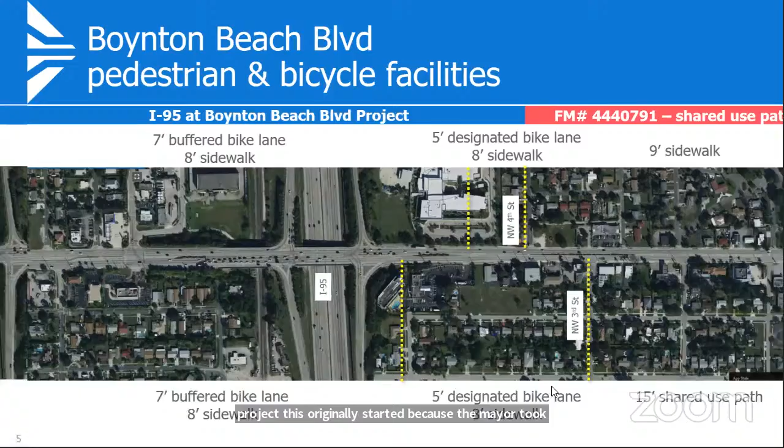Good morning everybody, Connor Campobasso. We've been working with both DOT and the city on this project. This originally started because the mayor took a look at the DOT project at the interchange, and he wanted to provide a little bit more space for cyclists, both on the sidewalk and on the roadway. So through the interchange of Boynton Beach Boulevard and 95, there's a 7-foot buffered bike lane, as well as a wider 8-foot sidewalk to allow for both pedestrians and cyclists.

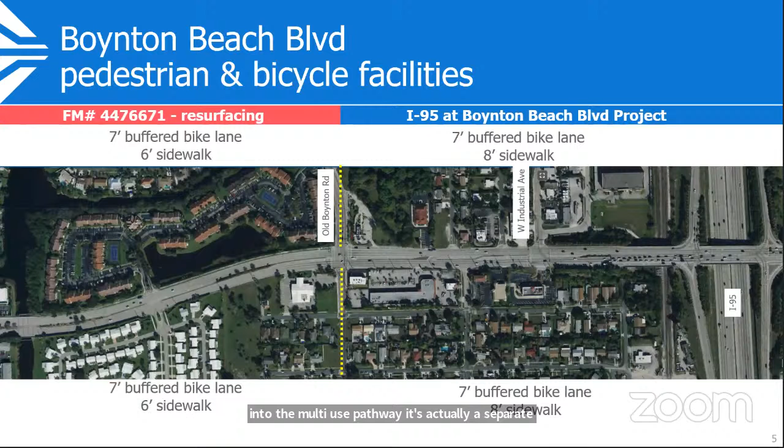There's also other projects in this area. When it merges into the multi-use pathway, it's actually a separate project being done by the city. The reason why it's a multi-use pathway in that area is, one, there's not a lot of right of way in that section, and two, it's transitioning into the more downtown areas. So they wanted something a little bit slower and more conducive to that. So what they decided on for that section was that multi-use pathway, and that's why it transitions into that during that area.

The multi-use pathway in that area on the north side, I believe it's 9 feet, yeah 9 feet, and then 15 feet on the south side. So we think that's enough space for both pedestrians and cyclists to intermingle in a safe way, and so does the city as well as DOT. So that's kind of where the alignments came from, if that answers your question.

Yeah, Mayor Grant and I don't agree on this, we've had several different discussions about it. I just think it's dangerous. You get a deaf mom pushing a carriage with her infant, and she's got a little 3-year-old running around in front of her, and she's not going to hear a polite bicyclist say 'on your left,' so she's not going to know to collect her child. And a bicyclist doing 20 miles an hour hitting a kid who weighs 40 pounds, that's some serious damage. And the kid doesn't have a helmet, at least the bicyclist should, but it's just dangerous.

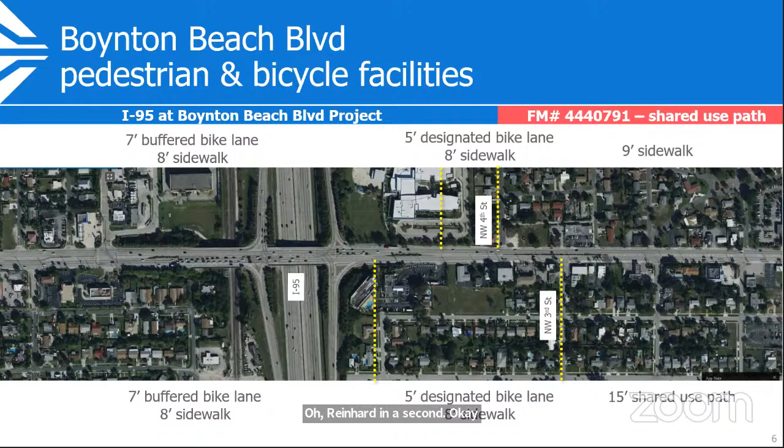So the next item is a resolution affirming TPA support for the Atlantic Avenue widening project from Florida's Turnpike to Jog Road. Connor Campobasso will be presenting this.

Good morning, everybody. I'm just going to give a short intro to the resolution portion, and then DOT is going to give a full presentation on the different typical sections and everything going on in the corridor. I wanted to highlight the resolution and give you some background on where it came from.

This project has been programmed into our TPA for a while now, and DOT's been working on the PD&E process. They've even held a public meeting, and during that same timeframe they also did a presentation to our board. The board had some concerns about different portions of the project, specifically the typical section as well as the interchange at Jog Road.

With the typical section, their major concern was that a roadway with 6 lanes and speeds of 45 miles an hour wasn't really safe for road cyclists to be biking on, especially if there was no protection for them on the roadway.

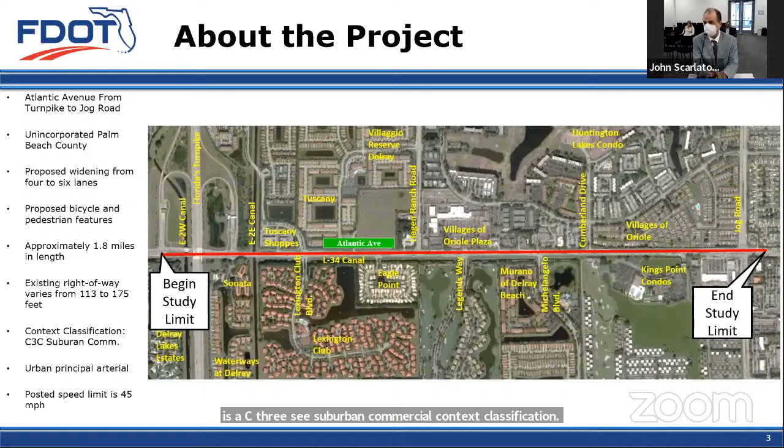This typical section, which we are showing, is from Turnpike to Cumberland Drive. It comprises a 22-foot median, 6 travel lanes, 3 in each direction, which are 11-foot lanes with 7-foot buffered bicycle lanes on both sides of the road. There's a guardrail on the south side to protect from the canal hazard for drop-offs, and a 10-foot sidewalk on the south side and an 8-foot sidewalk on the north side.

This was what was originally presented for this segment. For the canal, we would be looking at having to reduce some of that canal right-of-way anywhere between 55 and 90 feet. Lake Worth Drainage District, which owns and maintains the canal, has requested to maintain a minimum of 75 feet. With that, there are some areas where we would be looking to possibly pipe the canal, so we're working with the Lake Worth Drainage District on that.

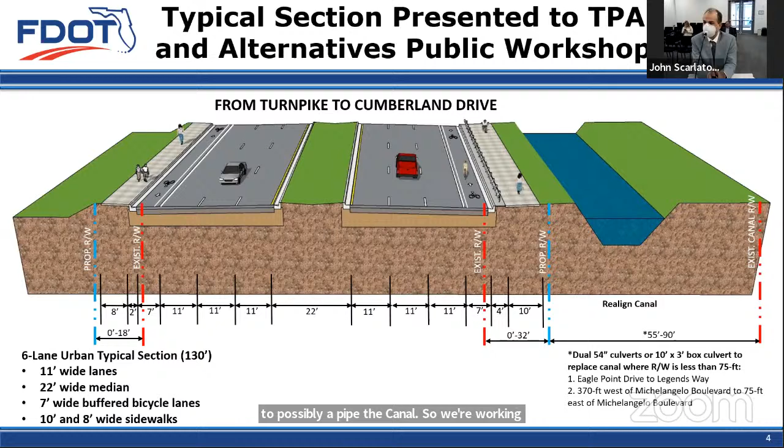The next section is from Cumberland to Jog Road. The roadway features are the same as the previous typical section, still with a 22-foot median, 6 travel lanes comprised of 11 feet width each.

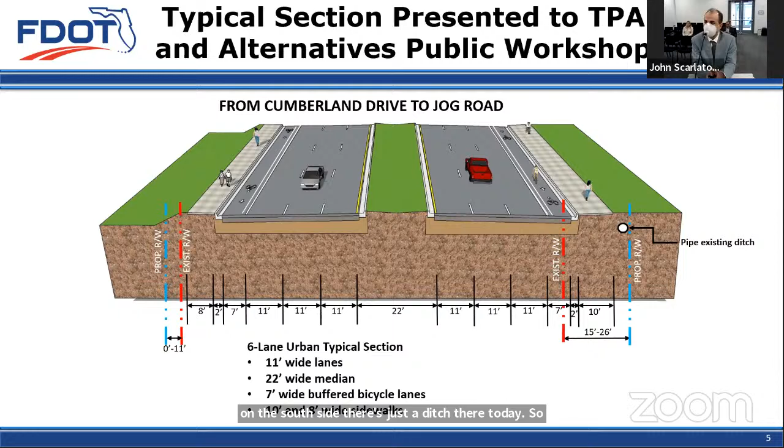Still have the 7-foot buffered bicycle lanes, 8-foot sidewalk on the north side, and the 10-foot sidewalk on the south. The only difference here is there's no existing canal on the south side, just a ditch. So we've coordinated with the Lake Worth Drainage District, and they've given us the okay to consider piping this area since we would be filling that ditch.

Some of the feedback we received from the TPA board presentation was to look at wider pathways, potential shared use paths on both sides, and physically separated bicycle lanes along the corridor.

We had our public workshop held at the end of June, virtual on the 28th and in person on the 29th. There's a pretty long list of comments received—concerns about noise, impacts to driveways on the south side where there are residential communities, and so forth. One key takeaway was the request for physically separated bicycle lanes, requested by one of the commissioners.

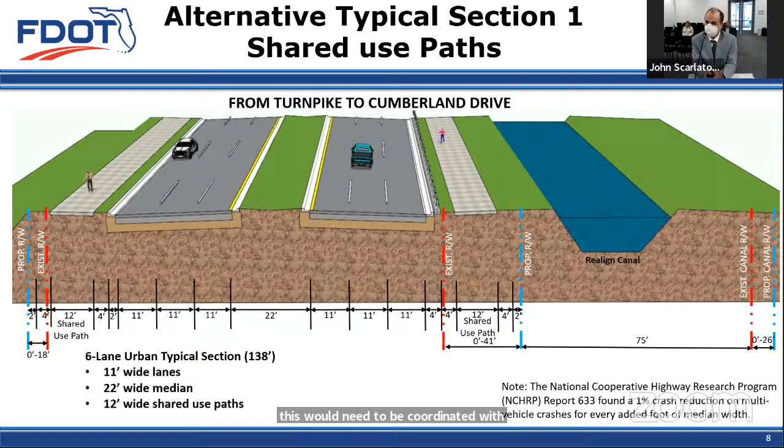You'll notice we're looking at some potential right-of-way acquisition on the south side of the canal from private property with this alternative. This would need to be coordinated with Lake Worth Drainage District to see how much of the canal can be piped to avoid those impacts on the south side.

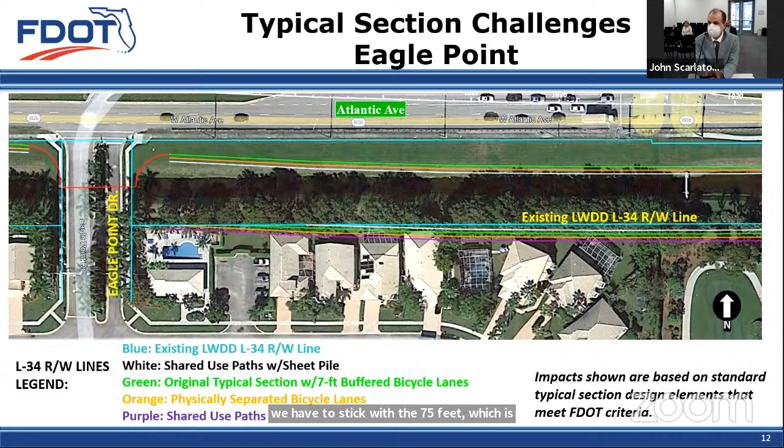So some of the other challenges is the transition of the typical section going to the west here. We were originally with our first concept looking to... so we were looking at transition at the intersection just east of, on the east side of, the Turnpike Bridge. Because to the west of that intersection, there's already striped out area for the 6 laning.

So with that, we weren't looking to widen any of those bridges. The 2 bridges that you see on the east side of the Turnpike Bridge, we would just be doing a restriping configuration. So with these new alternatives, we would have to widen those bridges if we were to carry this through the intersection all the way to the other side of the Turnpike. So that's going to be a lot more added cost to widen those bridges.

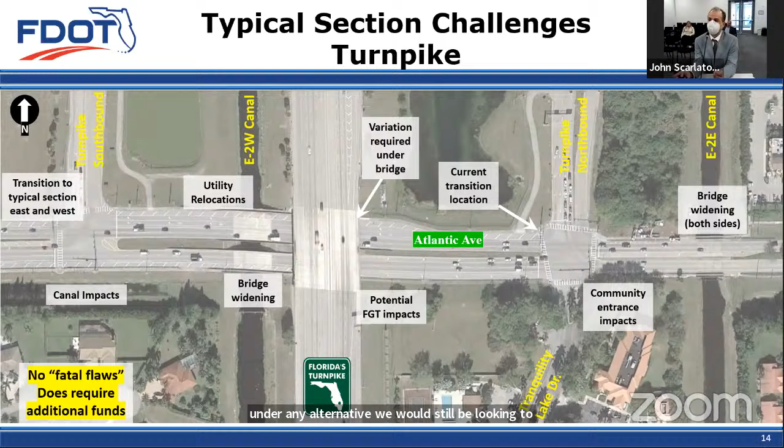There's going to be more utility impacts if that moves forward, as well as the recently widened bridge, which is at the E2E canal to the right of the screen. That north side of the bridge was recently widened and opened to construction earlier this year, so we would have to further widen that, as well as widen the south side. Under any alternative, we would still be looking to widen the south side of the bridge, but previously we weren't looking to further increase the width of the north side since that was just recently widened.

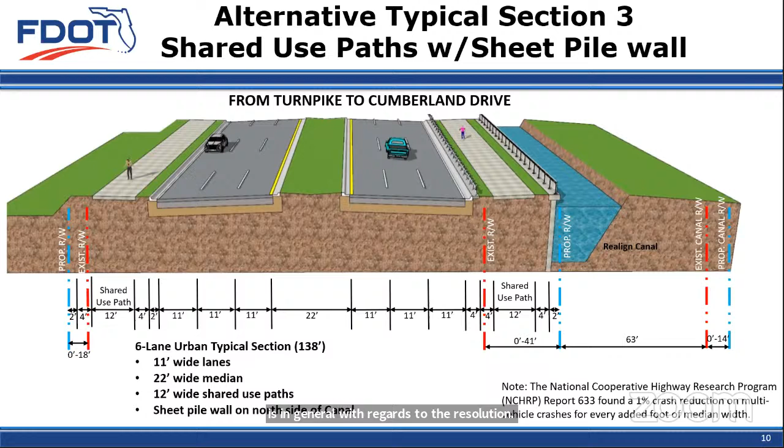Just a few comments. One is in general with regards to the resolution. I have a little bit of concern with the way it's worded, in the sense that it's supporting the project as a whole. And I take that to mean that if we were to approve the resolution, we support all of the alternatives presented here. I think you're hearing a lot of discussion about concerns with some alternatives, and preferences for others. Since there doesn't appear to be any prioritization of which one is preferred, approving the resolution makes it sound like we're okay with all of them.

On that note, with regards to the alternatives, I think this discussion of a shared use path versus separated bike lanes versus buffered bike lanes is coming up quite frequently across all of our projects. I'd be intrigued—maybe it's a separate discussion item for a future meeting—to figure out which one genuinely is better, or if they're the same but better for different groups. I think you see some difference of opinions with regards to it.

I have my own preference—I'm kind of with Ted with regards to concern about shared use paths, especially in urban situations where you have a lot of people walking, potentially tables and chairs on the sidewalk, and then putting cyclists into that creates a lot of concern. With regards to the alternatives presented, I think it's unfortunate that for 2 feet of additional concrete to make it a shared use path, you lose an entire separated bike lane. I think that trade-off isn't necessarily fair.

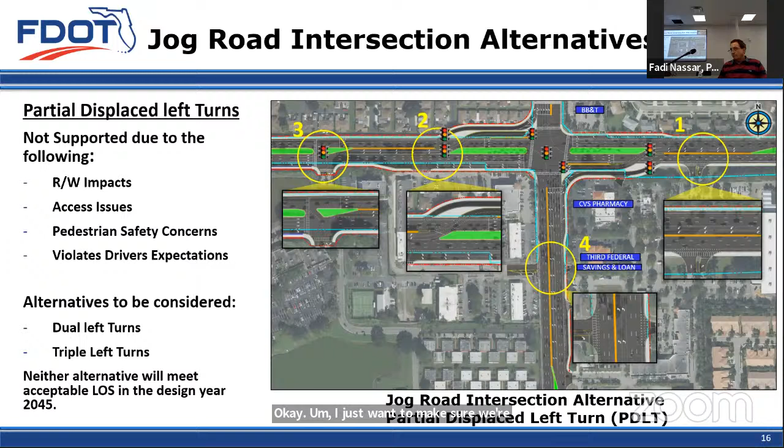I just want to make sure - we had a lot of really good comments and a lot of variety. Was there something you wanted to talk about, Jean? Okay, and a lot of variety in the comments, and I appreciate all that.

I think the goal here, as we sit as the committee, is balance, because we have to balance our charge - safety for pedestrians and bicyclists - with progression of the vehicles, and how we promote multimodal solutions for the most amount of people is really something we have to not only balance, but compromise over. So we have to think about how we're going to get the most amount of people out of their cars, and trust me, I'm one of them.

I like to sit in my car because I have to drop off kids and make errands and do all these things. But one of the things that really made sense to me was not only getting out and riding your bike or walking, but when we did that bike walk audit with Alyssa and her group on Indiantown Road, which is very similar to the road we're talking about today, Atlantic - it's 50 miles per hour. Being context sensitive to what it is, having the driveways, and understanding how to get people out of their cars to help reduce congestion is really about how you make people comfortable.

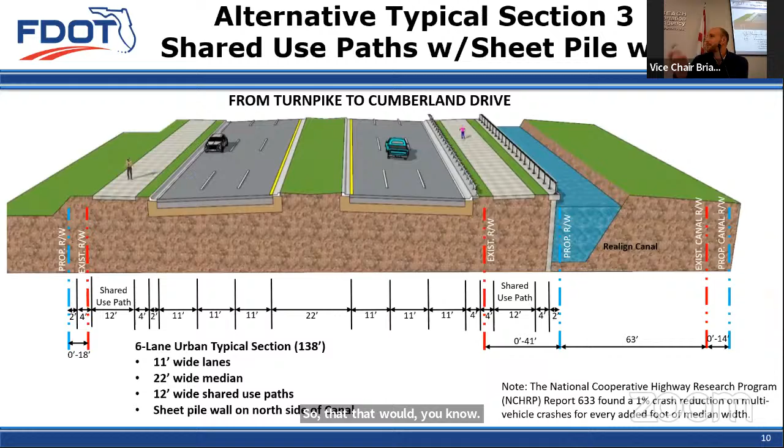Mhm, yeah, is that, this one right here you're talking about? Yep, so that is an option.

So just to be clear, the resolution means that if that gets adopted, we can move forward with anything that we just presented today out of these 3 typical sections. So we would like to get the guidance so that we don't come back several months from now, go to a public hearing, present a typical section, and then someone says, well, we didn't want this, we wanted this one.

So the motion on the table is all of the alternatives and just supporting the project, just to be clear. Correct. It's essentially guiding DOT to at least incorporate a minimum spec of 10 feet of sidewalk, but that includes all these typical sections that they should have, and to get everybody's comments, which we've been doing and all of the other advisory committees have been doing.

I'm not sure if the maker of the motion, or maybe we should just see how it goes. And if it fails, then we would need to, because there's a lack of specificity in the resolution of whether or not a separate motion needs to be made.

Okay, John, do you have additional comments? No, oh, thank you. It's okay.

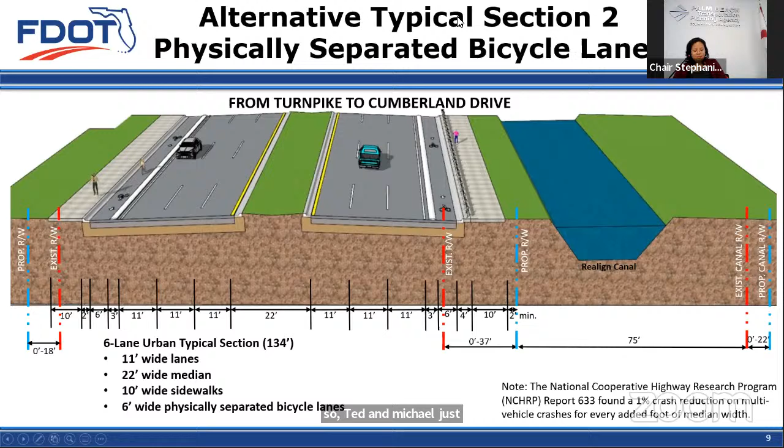Tracy Phelps, Yes. Bruce Rosenzweig, Yes. Craig Pinder, Yes. Ted Goodenough, No. Joanna Paluso, Yes. Joanne Scaria, Yes. Fadi Nassar, Yes. J.C. Berry, Yes. David Willock, Yes. Jean Matthews, Yes. Yash Nagal, Yes. Michael Owens, Yes. Ryan Harding, Yes. John Roach, No. Brian Rusher, Stephanie Thoburn, Yes.

So it passes with 2 opposed. I have John Roach and Ted Goodenough as opposed. Good job, everybody.

All right, next item. I think we're on informational items. Yes, so the Palm Tran Major Transit Development Plan update, and Palm Tran staff and consultants are here to present this item, including my Jill Quigley, who I used to work with a while ago.

Good morning, Anna Bielawska, Senior Transit with Palm Tran. We are excited to present Accelerate 2031, which is Palm Tran's major transit development update. This is our strategic vision for transit services in Palm Beach County for the next 10 years. Jill Quigley from Tindale Oliver will be presenting the item this morning.

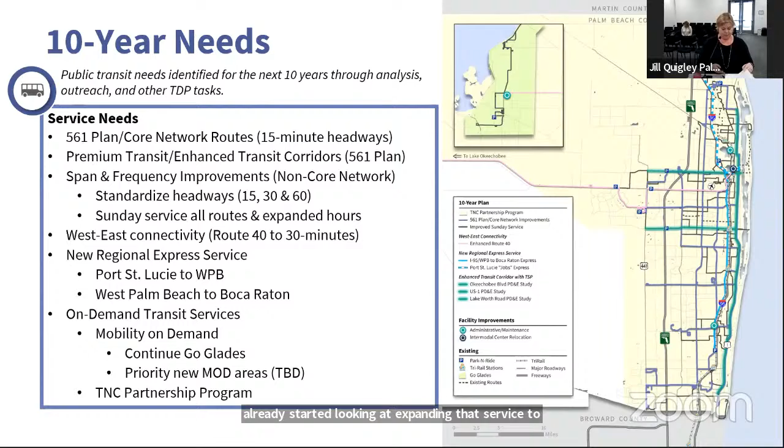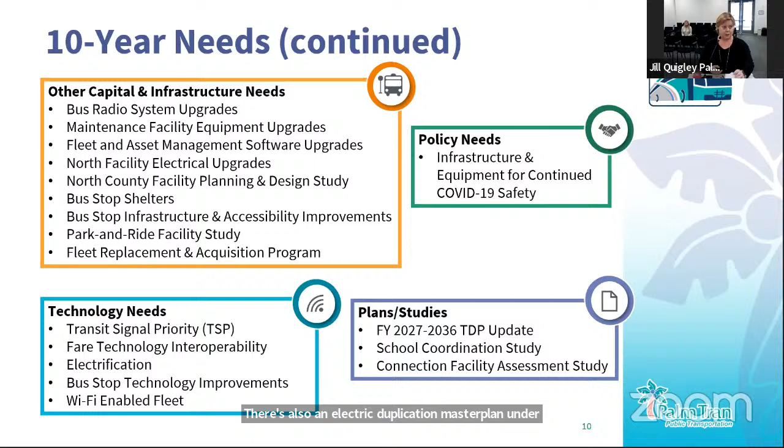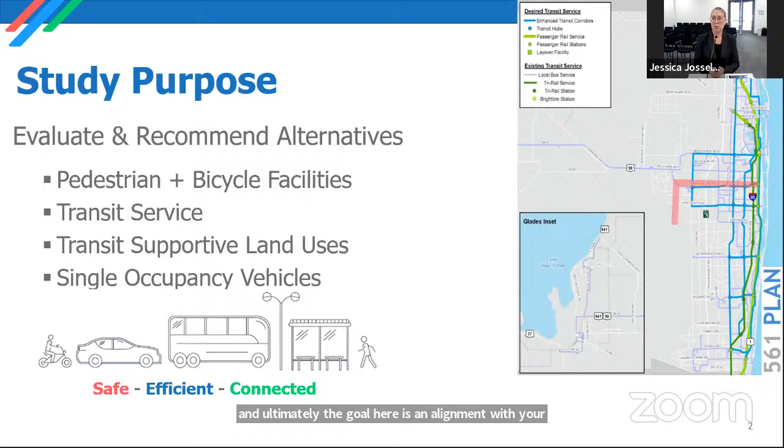Just as a reminder, given it's been a little bit of time, the study purpose of this corridor study is really focused on enhancing transit service from the mall in Wellington to downtown West Palm, and also looking at how to improve the pedestrian and bicycle facilities that would support that transit system. Ultimately, the goal here is in alignment with your 561 plan to create more transportation options throughout the county and create a safe, efficient, and connected system.

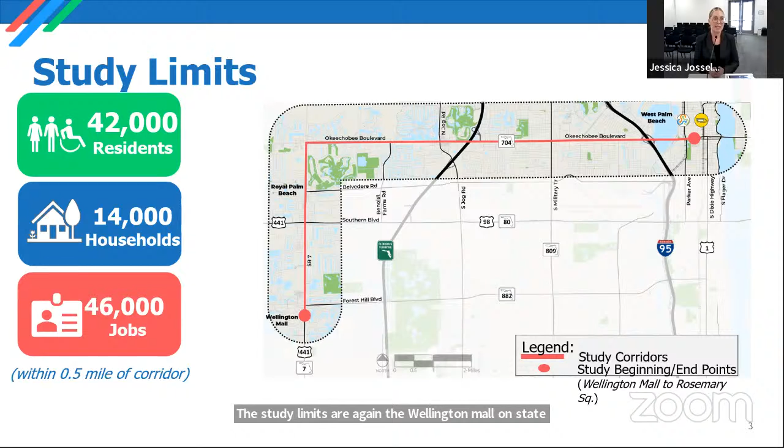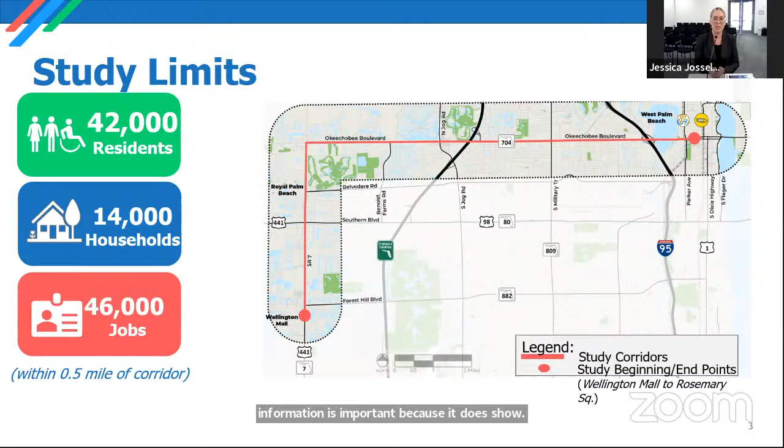The study limits are the Wellington Mall on State Road 7, traveling north to Okeechobee, and then heading east into downtown West Palm. We have a graphic here that shows the number of residents, households, and jobs in the corridor. This is important because it shows a high number of residents and jobs: 42,000 residents and 46,000 jobs. So we see this as a productive corridor to look at enhancing transit to provide more opportunities for folks living and working in the area to have different options than their car.

And I will pass it to Stuart, who's going to walk through some data findings along with me. Thank you very much, Jess.

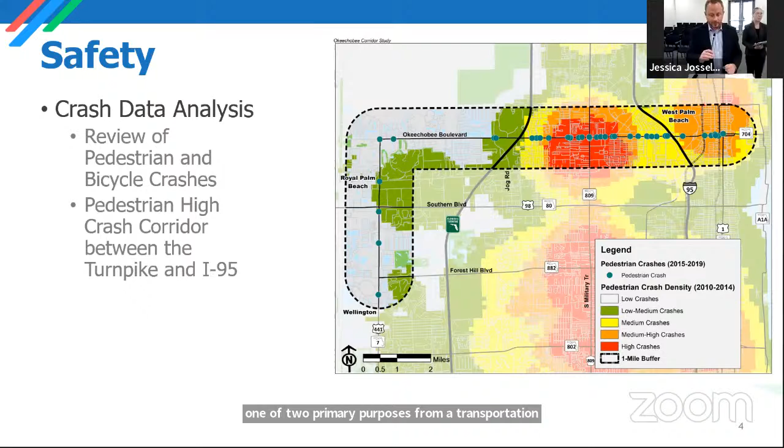From the purpose standpoint, one of two primary purposes from a transportation perspective is multimodal safety, and trying to enhance multimodal safety. Crash data for the Okeechobee Boulevard and State Road 7 corridor show that multimodal safety is an important issue that needs to be worked on and addressed immediately based on our current data.

The heat map shown on this slide is from the TPA's Pedestrian and Bicycle Safety Study, which shows that the portion of the corridor between the Turnpike and roughly Congress Avenue is one of the worst locations in the county for pedestrian crashes and fatalities. TPA's Vision Zero plan found a similar result.

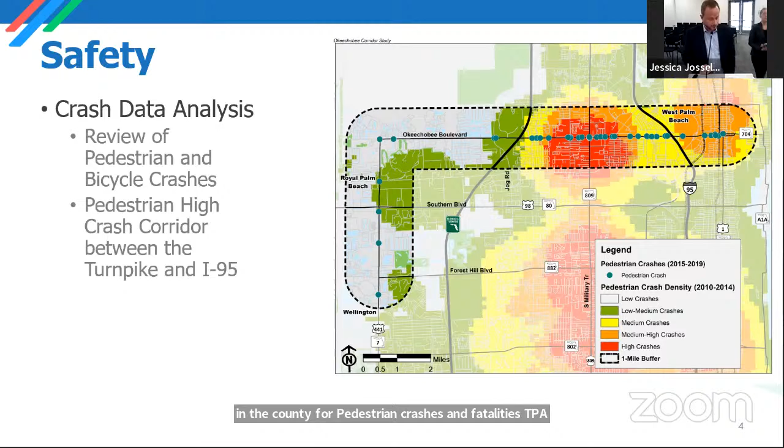We've also reviewed even more recent crash data from an online tool called Signal 4 Analytics, which shows that pedestrian crashes and fatalities continue to be a concern. We've had 12 fatalities in the corridor in the most recent 5 years of data. It's actually one of the few corridors in Palm Beach County that has more bicyclist crashes than pedestrian crashes, although the bicyclist crashes tend to be more spread out, whereas the pedestrian crashes tend to focus in that center portion of the corridor.

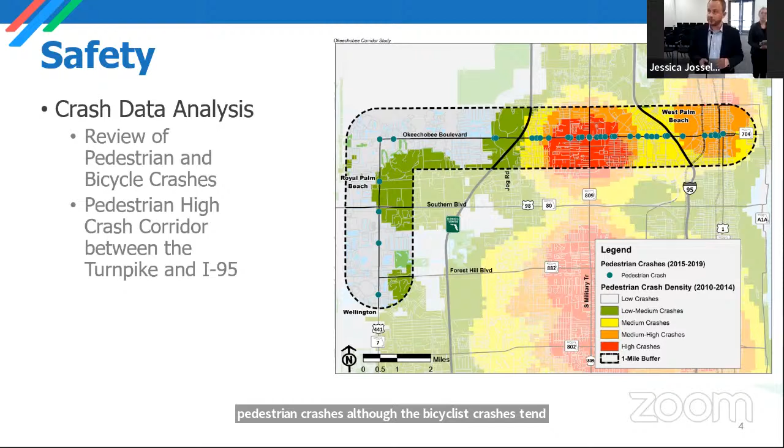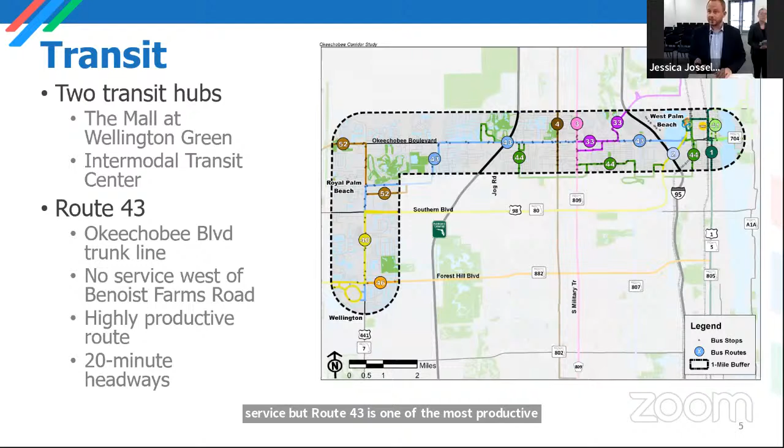Route 43 is the West Palm Beach crosstown route, which most closely mimics the corridor study area, although not exactly. There are some portions of Okeechobee Boulevard that don't currently have service, but Route 43 is one of the most productive routes in Palm Tran's fixed route system. Headways were recently updated to 20 minutes on Route 43.

Now I'm going to go over the health and social vulnerability assessment that we did. This is an important component of our study where we're trying, as best we can, to integrate the health component and communicate with the public and everyone involved that the transportation decisions we make can potentially impact the health of communities. So we pulled data to show where we have the poorest health conditions within the study area: asthma, heart disease, cancer, things of that nature.

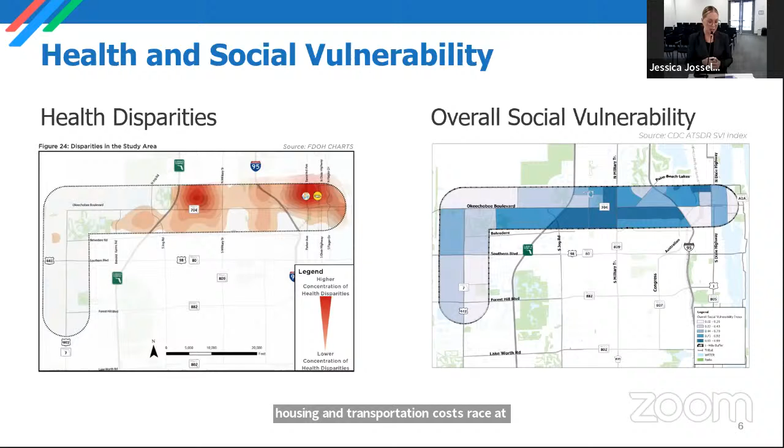We found that the areas with the most conditions, if you will, are east of the Turnpike into downtown West Palm. We then overlaid that information with additional information such as housing and transportation costs, race, ethnicity and language, socioeconomic status, and household composition.

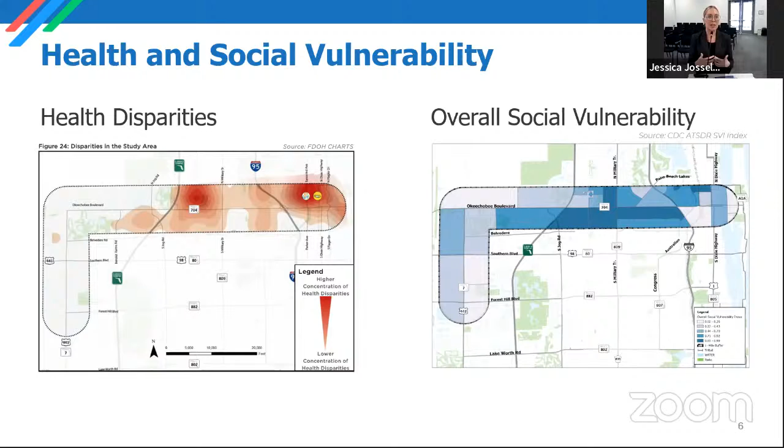We overlaid that information to develop an assessment of where we need to consider the most vulnerability of our populations. So as we're making transportation decisions, and Stuart's going to walk through the alternatives, we're considering these areas in darker blue, which are mostly east of the Turnpike along Okeechobee, so that we're not negatively impacting them with our transportation choices, and that we're taking that into consideration.

And we also have workshops that we have done and will be doing. So today I just wanted to go over the first public workshop. It kicked off August 19th in person. We had about 40 people that attended, following COVID safety protocol.

In order to engage more of the community and get more feedback, we also went online and had a virtual workshop all the way through November 12th. Melissa, Cassidy, and James got boots on the ground and got the word out to get people to the virtual workshop. We had over 1,300 workshop views, many repeat visitors, which was great to see. We also had several people provide input in our survey and on our interactive comment map.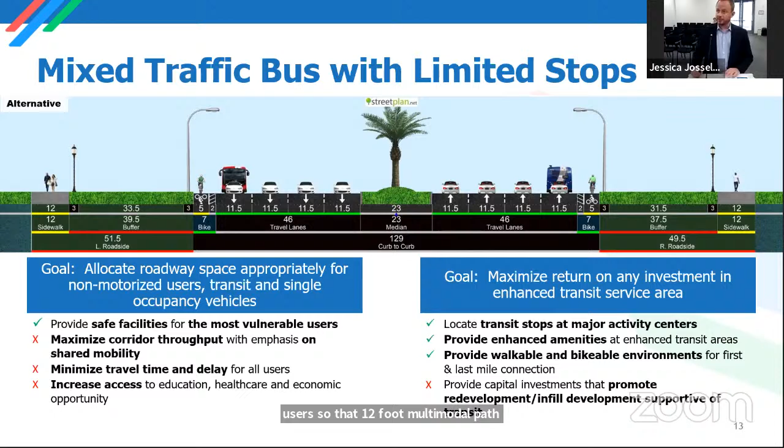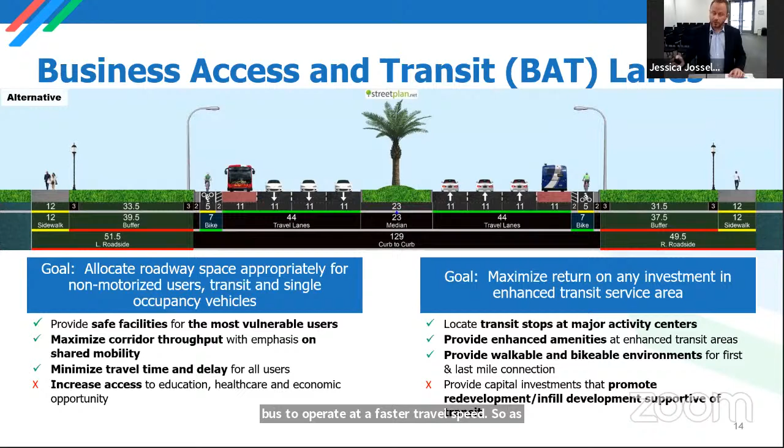The next alternative is called business access and transit lanes, or BAT lanes for short. The BA stands for business access, meaning that motorists could use the outside lane in order to execute right turns into driveways or onto side streets in locations that don't have a dedicated right turn lane. Other than that, the outside lane would be available for preferential use by transit vehicles only. So vehicles making turns would be allowed to use it, but otherwise the bus would have much fewer conflicts in the outside lane, allowing it to operate at a faster travel speed. As we go through these alternatives, you'll see more and more of the evaluation criteria get a green check mark.

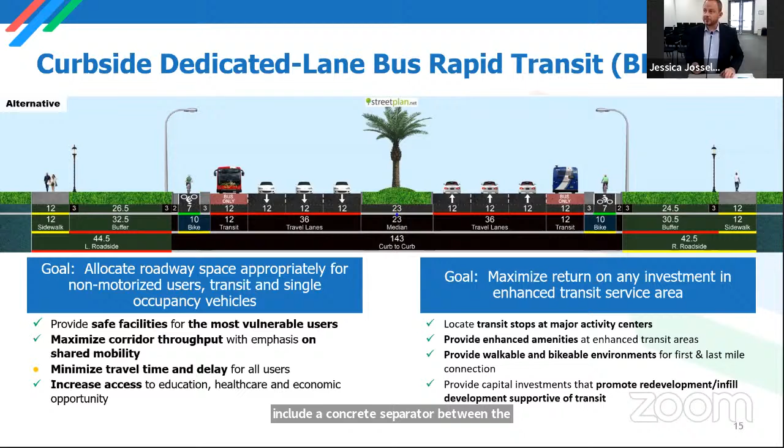The next alternative is called curbside dedicated lane bus rapid transit. This is the first of the alternatives we call an exclusive guideway for transit, meaning transit vehicles would have exclusive use of their lane. This would essentially create a bus-only lane in the outside curb lane of the corridor. At this level of investment, we'd expect the roadway to be reconstructed to provide protected bicycle lanes—you see the separated bicycle lane there in the 10 feet of space—including a concrete separator between the bus lane and the bicycle lane, along with the multimodal path, consistent across all these alternatives.

The next one is a center platform dedicated bus rapid transit. The dedicated bus guideway is now in the median of the roadway instead of on the outside. Essentially, think of it as constructing a 2-lane road for buses in the median of Okeechobee Boulevard. Passenger access to the buses would also be provided in the median in this alternative, accessed from existing signalized crosswalks that would now provide direct access onto a center platform station structure in the median.

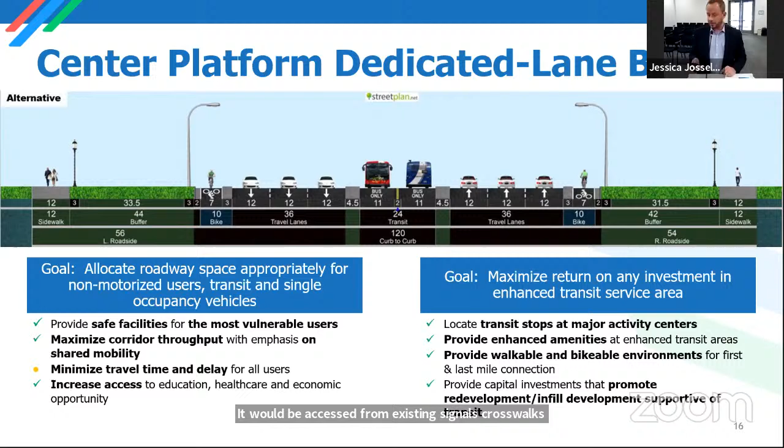The next alternative is similar, but it's light rail transit instead of bus rapid transit. This is one of two alternatives being considered that would actually introduce a new mode of transit—light rail transit. This would come with some additional administrative costs because new maintenance and storage facilities would need to be introduced, since there currently is no operator of light rail transit in Palm Beach County.

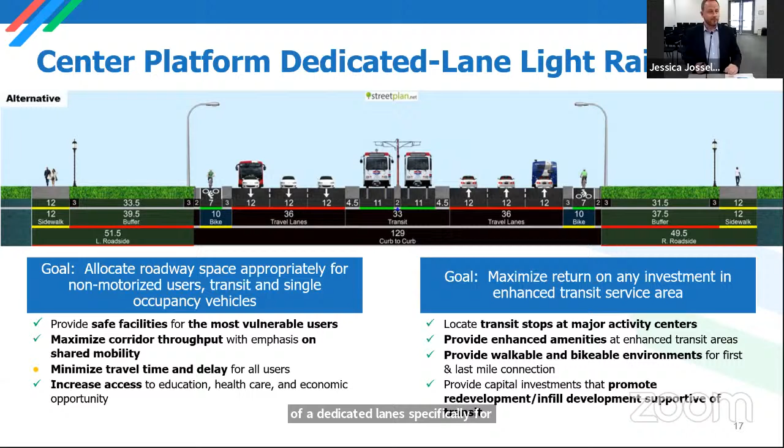I also want to point out that in our evaluation of objectives, on the left side, for minimized travel time and delay for all users, the dedicated lane transit alternatives do not get a green check mark. Although they do minimize travel time for transit users, we anticipate about a 15 to 20% increase in travel time for motorists, because designating a dedicated lane specifically for transit would reduce the amount of capacity available for motorists.

The only alternative that gets a green check mark across the board is elevated grade separated light rail transit. Travel time is minimized for all users because the transit corridor is separated from the roadway, allowing the capacity of the roadway to remain unchanged. However, as you might imagine, this comes with the highest level of cost.

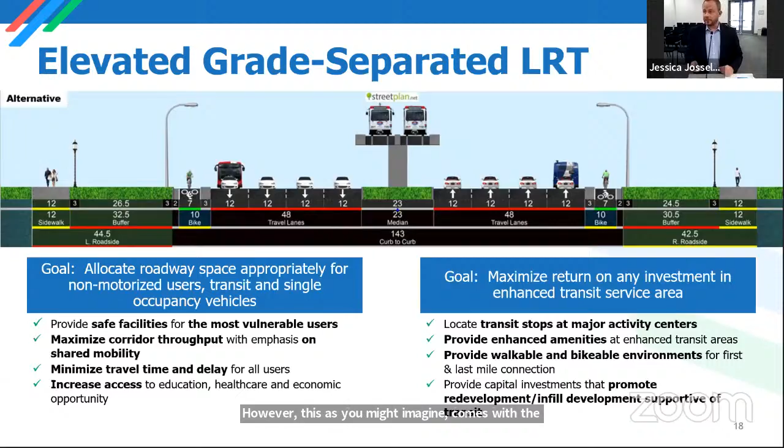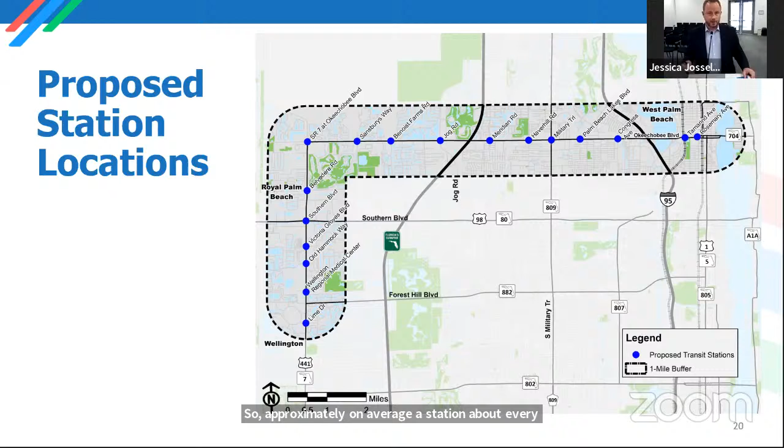This is the list of stations that were used to develop the ridership numbers as well as our cost numbers. There are 17 stations spread across the 13.5-mile route, so approximately on average, a station about every 3/4 of a mile to 1 mile. And I'll turn it back over to Jess to wrap up.

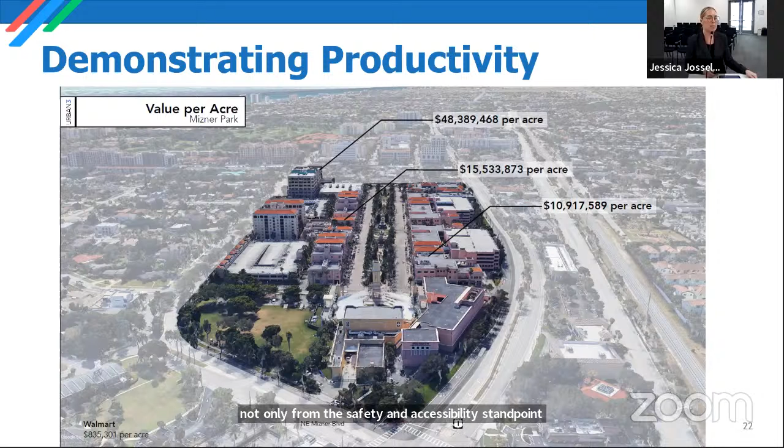So here at Mizner we have an example. This is a very high standard in terms of how Mizner was developed, but we have a range of 48 million per acre in value down to just under 11 million per acre. As a comparison, a Walmart built is around 835,000 per acre. So it really does make a difference how we develop, not only from the safety and accessibility standpoint, but from that taxable base that can be brought back into the community.

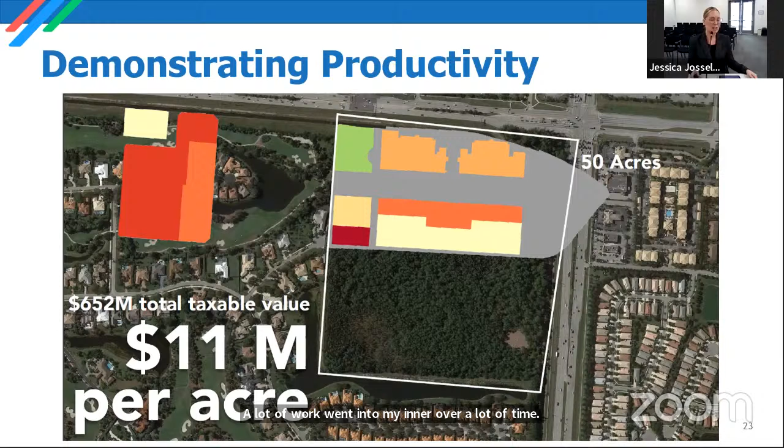Taking this example and in a fictitious scenario, drop it into the State Road 7 and Okeechobee corridor. Okeechobee is the roadway going east-west on this portrait, north is to the right here, and State Road 7 is at the top of the image. Dropping Mizner into this area, this land is undeveloped right now, so it's $0 coming back into the community from a taxable standpoint. As we look into the future, there is a mixed use overlay on this property, and it could potentially generate at a high level the 11 million per acre that you see here. This is just an exercise to show we're not suggesting Mizner be built here. A lot of work went into Mizner over a lot of time, but we just want to demonstrate that you can create more value with your land, and with transit coming, we would hope that would occur.

In terms of next steps, we wanted to highlight that we are continuing with the technical tasks that Stuart and I walked through today on the transit and roadway component, the health impact assessment, and also the land use component I just mentioned. In terms of upcoming meetings, we mostly wanted to highlight that we have our second of the 3 public workshops happening December 4th. This Saturday it's kicking off. I believe the team is going to be at a green market getting the word out, and that'll be open for about a month. We're not having an in-person option this round, it's going to be all virtual.

We will be sharing links to that when it goes live with all of you. We encourage you to go on and fill out the survey and give us your opinions in addition to your opinions today. We also wanted to highlight that we will be looking to wrap up this study in March of 2022, so we'll be coming to you with an action item then. But today it's just information only. So with that, we will open it up for questions and comments. We appreciate your patience as we got through all of that information.